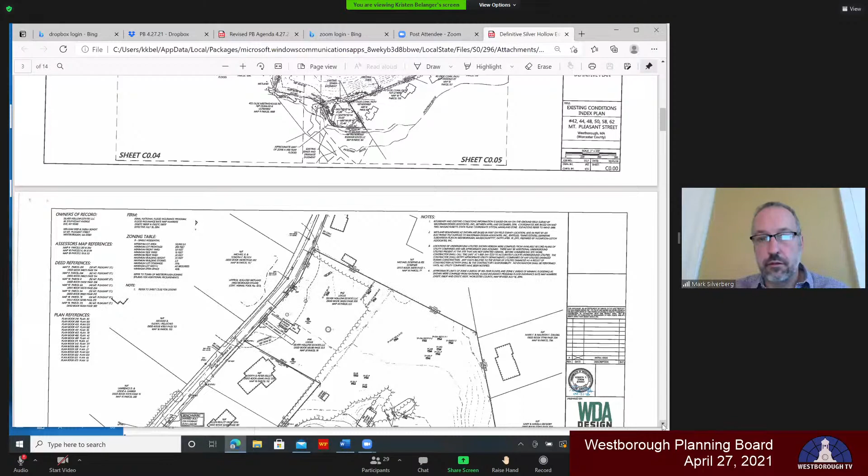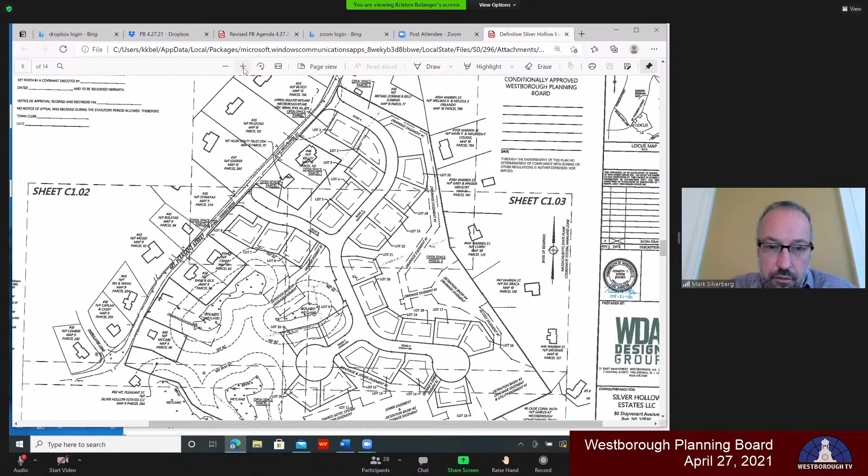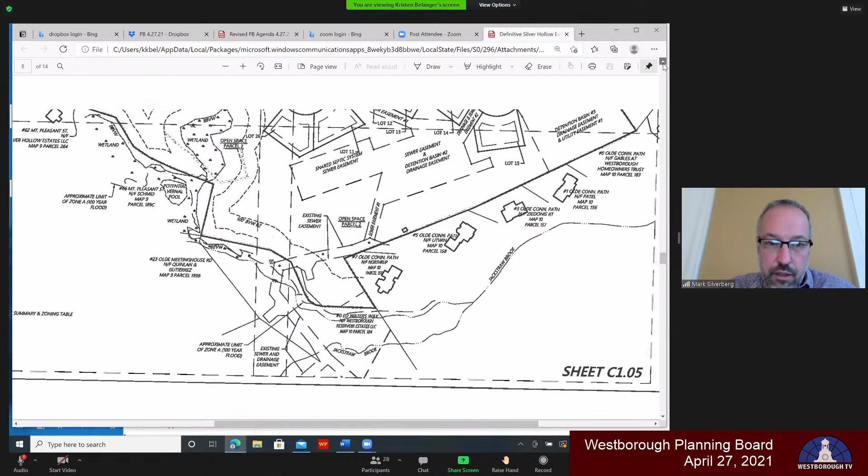All right, Kristen, I think you're bringing up the... Oh, okay. No, that doesn't have the lot numbers on it. Yeah, it does. They're tough to see, but they are there. I'm not sure if this can be enlarged, and the action is in the middle with these 10, 11, 12. Okay, so Road A on this subdivision plan, that's Barred Owl, the longest cul-de-sac? Yes. And Blue Heron is Road B, which goes out to Mount Pleasant.

No, Blue Heron is Road C. So Barred Owl is the one that goes all the way to Mount Pleasant, and you're right, that is one of the longest roads. I think this is called Blue Heron on a more recent plan. And so I see 11 and 12 there. Howard, this is lot 12. Is this the one you said?

I'm sorry, I'm not seeing what you're pointing to. Right here in the center. You see the little pointer? What were the lots again? It's 10, 11, and 12. There's 12, and 11 is behind it, so it could all be 10, 11, and 12. Can you see my pointer? No. So this cul-de-sac is Blue Heron Court, and 10, 11, and 12. Do you see that, Hazel?

Hazel, can you see that? You're muted. You're muted. Yes, I can see them.

Okay, what are the other lots being released whose numbers haven't changed? The ones staying as part of the release are 7, 8, down towards the beginning near Barred Owl, closer to Mount Pleasant. Also 21, 22, 23, and 24. Got it.

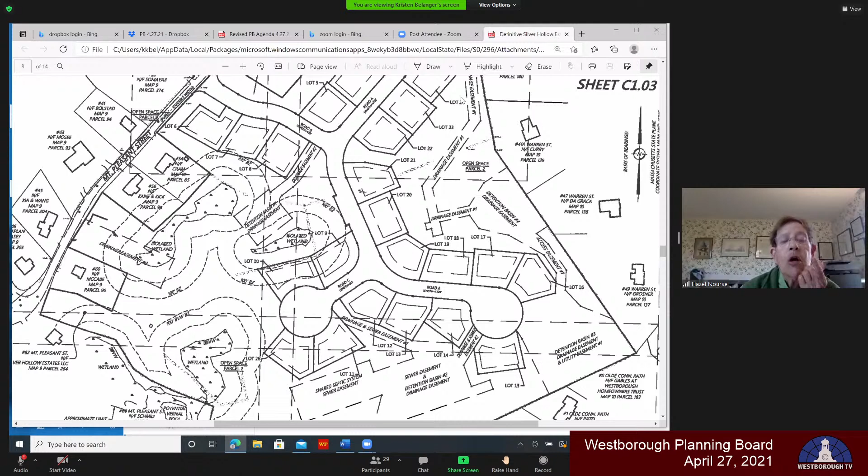All right, any other questions? We'll give Howard a chance. I have a question. The complaints that are coming in—are they all about the lots being worked on at the moment? Yes, that's my understanding. And again, we apologize for this. It should not be happening.

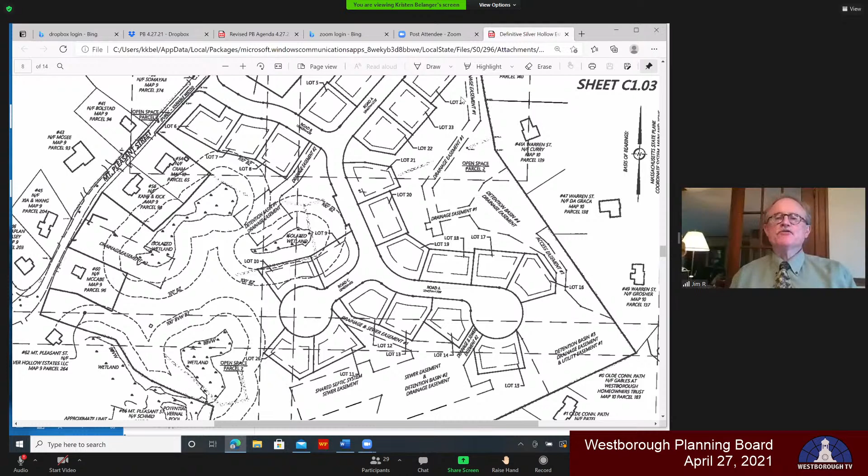Kristen, can you scroll the screen down? It's lots 1 and 2, which are right by the entrance. Pull the screen down. There you go. Do you see lots 1 and 2? Yep, right at the entrance. Those are the two lots being worked on, and those are the two lots that have received complaints. That's what I figured.

Were those released in a prior round? Yes. And those are the lots connected to town sewer? Correct. For the board's interest, there were 6 lots connected to town sewer, so they had 6 credits, and they asked for those 6 lots the first time around. Lots 1 and 2 are the first of those.

Okay, any other questions from the board? Does anybody want to make a motion on this? I would prefer to wait till next week to hear from the applicant about the issues we addressed at the outset. So if somebody wants to make a motion, we can discuss it.

I move that we adjourn this matter to our next meeting. Is it next Tuesday, May 4th? Tuesday, May 4th, yeah. I'll second that motion. Any discussion?

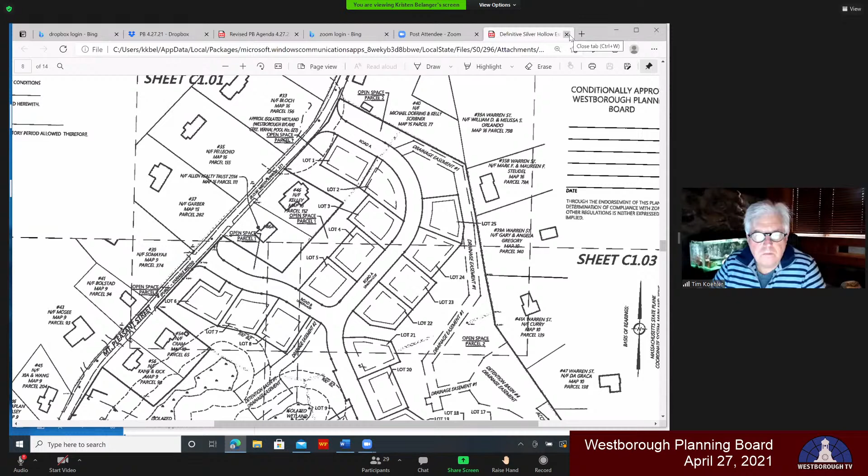Okay, I will move to a roll call vote. All those in favor: Hazel, yes. Jim Ball, yes. Tim Koehler, yes. Peter Bouchard, yes. And I vote yes as well. That's 5-0. Howard, if you could rejoin us next week, and please ask the applicant to attend the meeting.

Absolutely. I apologize again. I appreciate your consideration for this, and we'll see you next Tuesday.

Mark, before we leave this issue, maybe I should have brought it up before. Can the applicant please provide in writing the measures that will be taken—whether it's signage, posting a guard? I'd like to know specifically what they're going to do that can be objectively observed to address the problem, since simply passing communication to the contractors has not been effective. So I want to know what measures will be taken in addition to whatever has already been done.

And what's in place—agree with that when we discuss this again. Okay, thank you.

We will move on to the next agenda item. Howard, thanks for coming in. Thank you all, nice to see you. Thank you.

The next item on the agenda is a review and consideration of the preliminary residential subdivision plan for Rugged Trails, 228 Ruggles Street. Jim Robbins, I'll start with you to introduce this topic, and then we'll turn it over to the applicant for any presentation.

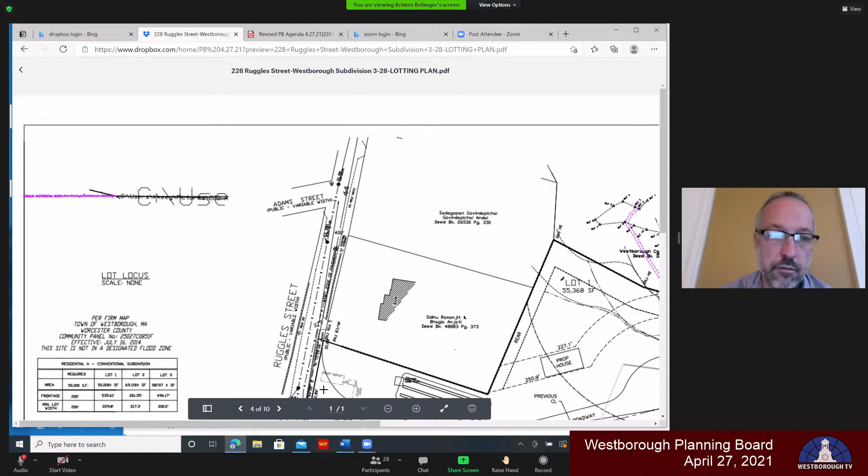Thank you, Mr. Chairman. As you know, this plan has been in front of the board for many months. One issue we were having was with the third lot—the lot on the top left of the cul-de-sac—making sure the house could actually be placed on it in a way that would conform with the town's zoning requirements for lot width, because that lot has an odd triangular shape with a tail running down towards the front on Ruggles Street.

After redesigning the lot and repositioning the home on the lot, the zoning enforcement officer is now willing to say that they can achieve the minimum required lot width.

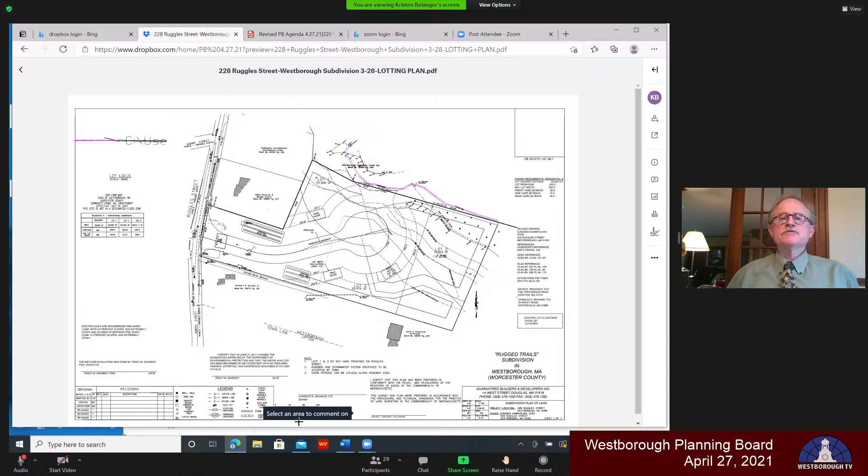We have complied with the frontage, lot area, and lot width. As Jim says, we got a letter from Fred Leonardo. I spoke with Board of Health many months ago, they're okay with the plan. We've done perk testing out there, and they will verify our two septic systems at the time we submit them. They didn't have any issues with the groundwater or anything, that would be submitted to them once it is submitted to them.

Lot 2 will be connected to sewer. We're allowed one sewer connection, and that's the lot we chose to connect. All lots will have town water.

We're looking for, I believe, one waiver, on the width of the pavement. The requirement is 26 feet, and we're asking for 24. That roadway length is 545 feet, and the roadway right-of-way width is 50 feet.

We have spoken with the Historical Commission. They were okay with demolishing the existing building on that site, but they wanted a couple of questions asked about the name. The owner of the property would like to call it Sarada Lane. Sarada means knowledge, and it's also his mother's name. That was the reason we were calling it that.

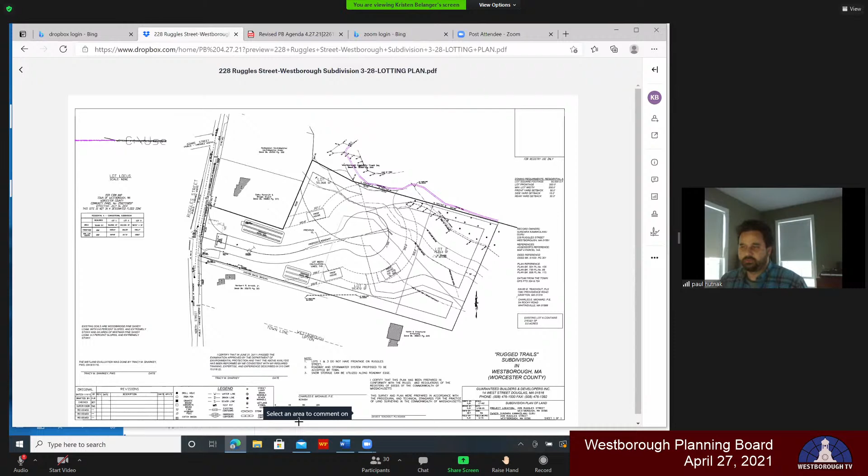Kristen, is it possible for me to share my screen and take you guys through the plan a little better? Okay, great, thank you. All right, you can see my screen now with the plan up on it? Yes, yes. Okay, thank you.

As was just mentioned, we've reconfigured this a bit, a closer view of the lots. Part of the calculation was to meet the lot width at the house and behind the house, so we took care of that. Another thing of note on this plan is that from the last meeting, we've added a small sidewalk easement that can be granted to the town, so if you do end up extending this sidewalk down Ruggles, you could then connect through this property to the sidewalk that will be on our property.

So here is the site plan area. As you can see, we have the roadway coming in, sloping down similar to before, and it comes into a cul-de-sac. This is the grading we're proposing. We have a plan profile as part of this preliminary plan as well, though we'd add every essential detail prior to a definitive submission. We wanted to show a good amount of detail to show you what was going on. We do have the house locations here.

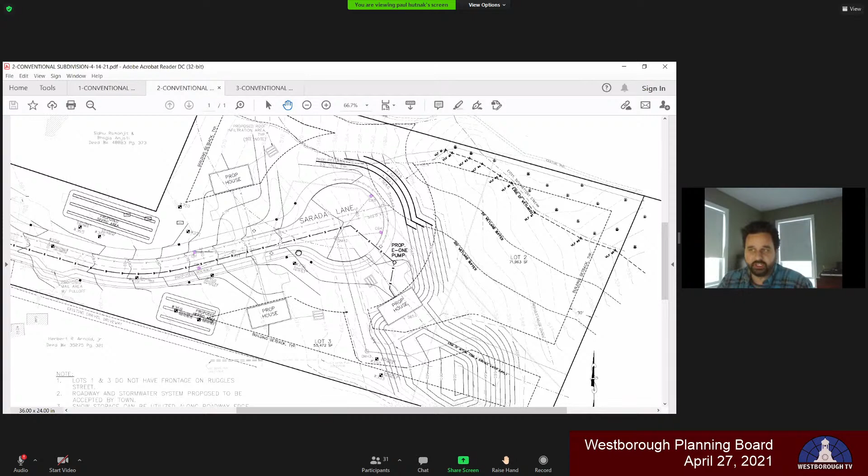We are on town water. As Karen mentioned, we have 2 septics, and lot number 2 will have a force main out to the street, connecting into the sewer in the roadway. And that is the project.

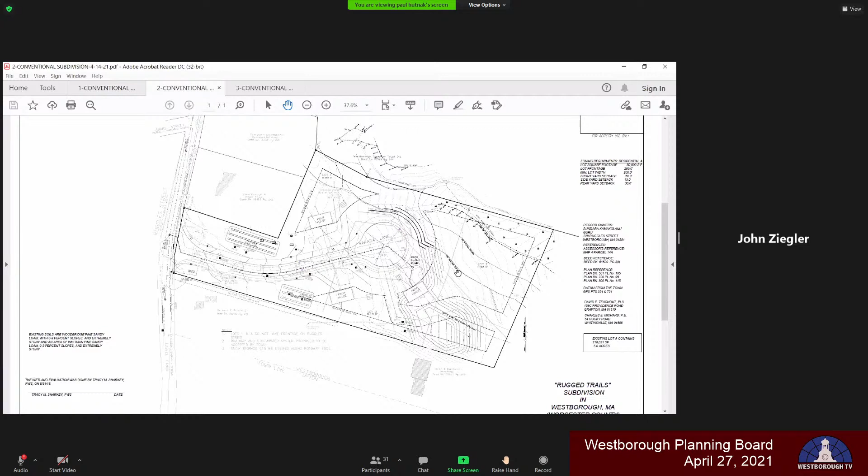Which lot is going on sewer? Number 2, right here - it's the back lot, essentially the furthest back. So that's actually the furthest from the sewer connection, I would think. It is, but that's the hardest spot to put a septic, in terms of the resource area. So it ends up being that one. In terms of sewer, they didn't necessarily care - they basically just say we have one connection because there's an existing connection, so it doesn't necessarily matter which lot to them.

Any other questions from the board?

I would encourage you to look at the open space subdivision as an option for this. I think you could make the cul-de-sac shorter and leave 2+ acres of open space that would abut the open space that I believe is Valley View Estates open space - I don't know if that's the right name. Like Long Drive and so on is down there, and I believe Westborough Community Land Trust owns a parcel immediately abutting this lot with a small pond on it.

Mark, you're sort of muffled. Sorry, let me see if I can adjust my microphone.

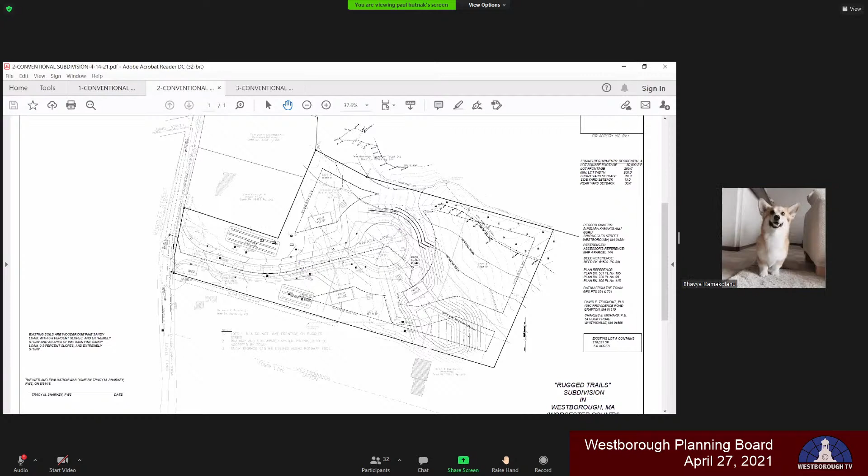What's the size of the overall parcel, Karen? 5 acres. Our regulations say, just for the board's knowledge, that if it's under 10 acres, it's the applicant's choice. Right. Okay. Well, I would prefer to see it as an open space, but obviously that's not an option in this one. All right. Any other questions from the board? Jim, do you need us to vote on this?

I have a couple comments before you move on. To the engineer, the regulations do require individual lamp posts at the end of each driveway. So you have 3 driveways, you'll have 3 lamp posts. Make sure that you take a look at the regulations so that you understand what that means. The intersection does require a street light, which you're proposing.

Thank you for that. There may be a utility pole somewhere near that intersection that would be applicable for adding a street light. However, you have to work with National Grid on that because they do own the utility poles. If not, you'll have to find a way to provide a street light at the end of that intersection. I think you'll be fine, but you need to work on that now.

Okay. I also want to be sure that your reduced width of roadway will accommodate our emergency vehicles, particularly our fire trucks. So the turning radius of your reduced cul-de-sac now, the paved area, needs to be able to accommodate the largest fire truck and the swept path for that. And that's something you'll need to work on during the definitive plan.

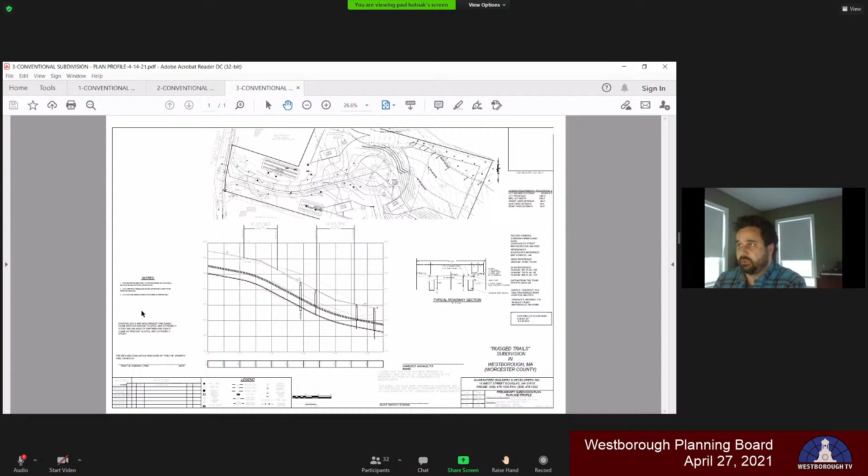I mean, there's 3 houses. So when we have 24 feet of pavement and 5 feet of sidewalk, that's a fairly significant amount of impervious area for 3 houses. So we're just trying to limit it as much as we can. And yes, I did add a note on plan 3 that a full fire truck turning analysis will be provided as part of the definitive subdivision.

So we do have that noted as well, for you to reference if you want to, or you can just condition it, or however you want to go about that. But yeah, we're certainly aware of that, and like I say, we will submit a formal waiver request with that reasoning. That would be great. And please note the section that you're requesting the waiver.

Okay. And also, Karen, during the initial proposal, there were a couple requests for waivers that now seem to have changed. So I'm going to disregard that and have you submit this as your new request. Okay. And we can talk more about it at the tail end of this week, so that we can make progress for our next meeting.

Okay. Sounds great. Jim, thanks for adding to that. I'm going to just go back to the board now that you brought up some other issues and see if anyone else had questions about that or anything else. I think we're all set. So you need us to motion to approve the preliminary plan?

I would just ask that someone make a motion to continue this to our next meeting. They've already given us... Okay, I'll make a motion to continue the discussion of the 228 Ruggles preliminary subdivision plan to our next meeting on May 4th at 6:30. Second. That, Mark. I heard Hazel first, so Hazel has a second. Any discussion? All those in favor, we'll do a roll call.

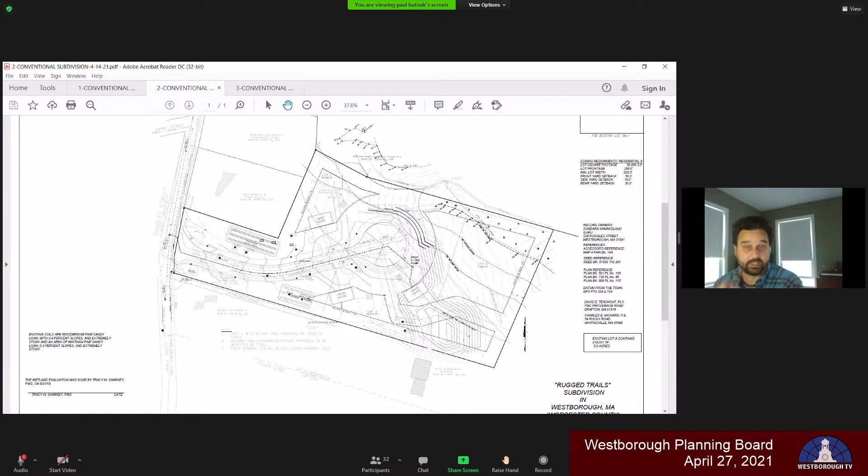Well, you're also continuing because you need to get the board to vote yes on your plan. And this is information that... That's good. I like that too. Yeah. Well, we're hearing this information for the first time tonight, and I don't have complete information to write an approval. Okay. So when I get that, that's why I said I'll work with Karen this week.

Sounds great. No, thank you. I appreciate it. I just wanted to make sure I understood what we needed to get you. So if I need to work on something, that's all. Sure. We'll get it worked out. No problem. All right, great. Thank you. Thank you, Jim. Thank you. All right. Can you stop sharing, Paul? Oh, sorry. Yeah.

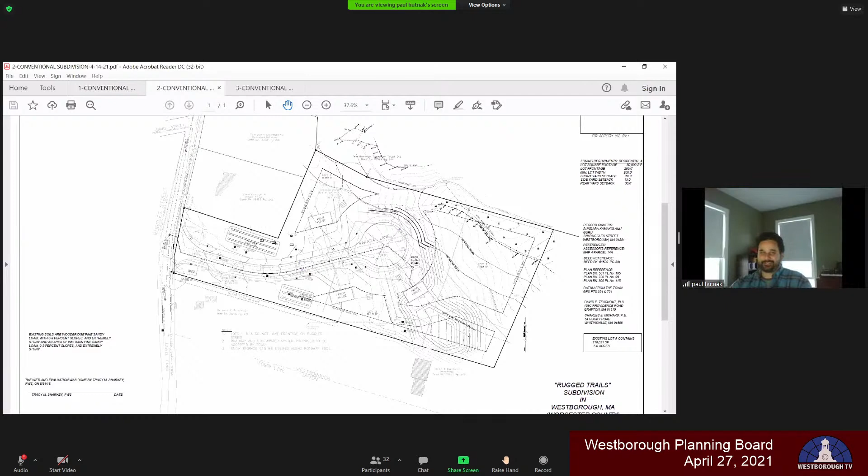All right, next item on the agenda is a continued public hearing for the site plan review application for 4400 Computer Drive. Jim, I'm going to turn this over to you as well to summarize where we're at, and then we'll have the applicant address the board. Thank you. So I see Bob Buckley representing Atlantic Management is on the call, as well as representatives from Atlantic Management and the owners Caruth Capital.

As you know, the last meeting was our first public hearing on this project, and we discussed everything from the site design to the impact potentially to abutters, to the intended use and operation of the site. At that meeting, we had a list of multiple questions that I typed up after the meeting and sent to the applicant the next day, requested them to come prepared this evening to address those.

The board received a letter from Attorney Buckley yesterday to address those. I haven't had time to review them with the applicant, so I would like to ask the applicant if they would present those answers for the first time this evening, and then we'll have an opportunity to react to those, and we can continue to work on them after this evening.

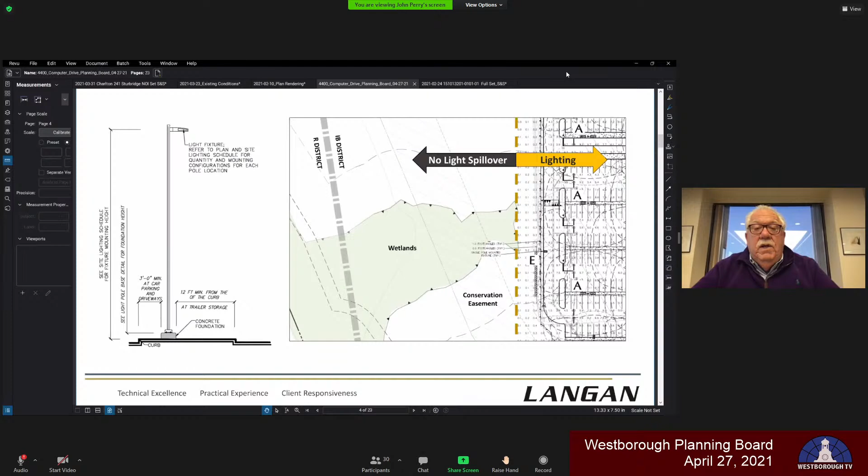And we have some graphic representation of that. This shows on the right is the lighting. The black arrow is no light spillover, and the hatched line going vertically is the control line. And you can see that that's quite a distance from the residential district. So we carry that around the site just to orient the board and the public. Where you see that lighting sign, that's the rear parking lot where NFI conducts its operations. And at the post-development phase of the project, there will be no light migration beyond that point. Again, a substantial distance from the residential properties that abut the project.

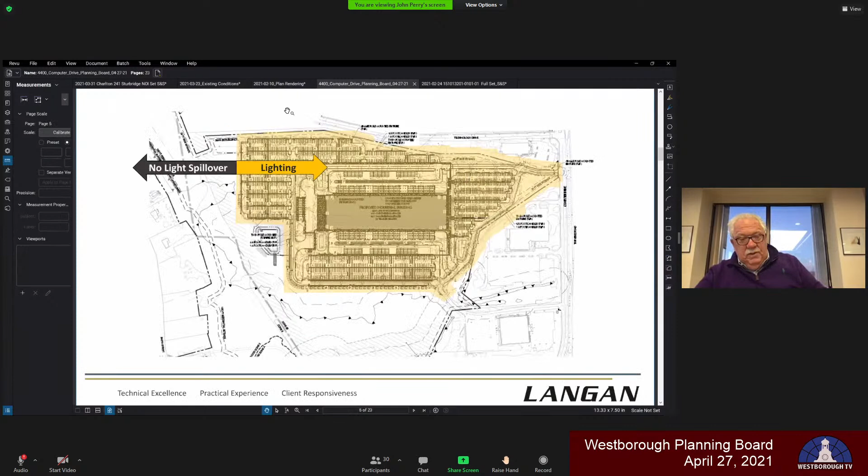There were some concerns about idling of vehicles and sound attenuation. Under the Mass DEP guidelines, as we quote there, there is a regulation that there'll be no idling in violation of that regulation. And certainly that is a requirement that we will adhere to. Moreover, when vehicles or trucks are unloading at the loading docks, it is policy that the engines are shut off and there's no light emanating from the headlights.

The new truck parking and loading docks will be over, it's cut off by the picture here, I can't see, 950 feet from the nearest house. Nearly twice the distance that exists today from the NFI operations. We are also going to maintain the 300 to 350 natural forest buffer. We are reducing the tractor trailers from the current operation, which is roughly 260 trips over a 24-hour period today from NFI, to 32 per day.

We are also exploring and will be updating the plans to provide sound absorbing and light blocking walls at truck parking and loading docks. So that will create an artificial buffer in addition to the natural buffer. Show the next slide, please. This is an example of the sound walls that will be placed adjacent to the loading docks to block both sound as well as light from the vehicles while they're located at the loading docks. Again, they'll be of sufficient height and sound attenuation quality to address the concern that was raised during the last hearing.

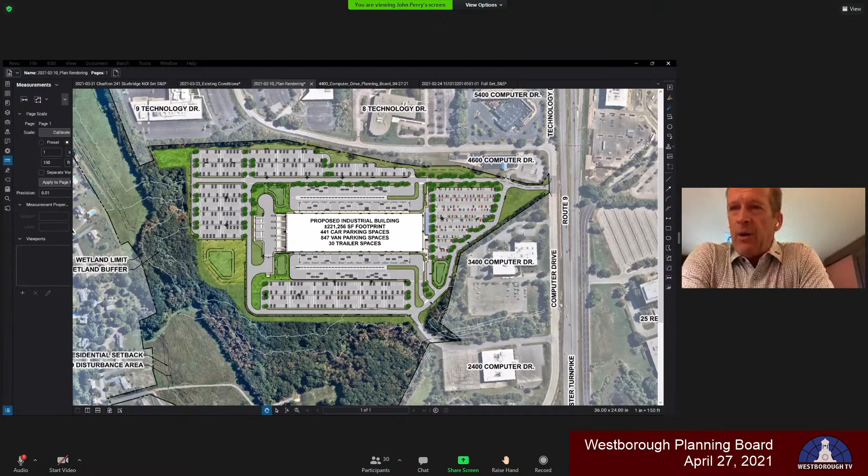All right. Any other questions from the board? Jim Ball, anything? Hazel? Yeah. Mark, go ahead, Hazel. No, you can go. I would comment that my preference is not to have the loading docks and the trucks at the front side of the property from an appearance, and I agree with the safety and flow. So my feeling is that moving it back away from that lower lot with the mitigation, I think that mitigation is very important, based on what we heard from the abutters last time, but I think that is well done. So from a safety standpoint and a flow standpoint, I like this setup. That was my only comment.

Hazel, you had something? Yeah, I just wanted to say that I'd gone up and looked at the site and gone up and looked from the residential viewpoint, and I think the mitigation efforts are going to make a huge difference to the people that are living back to the commercial properties there. It's certainly going to definitely improve what they're living with now. And I, quite frankly, am impressed with the mitigation efforts which the applicant has put forth at this point, because I think it's going to make a huge difference to the neighborhood. And I think they all make sense, and I understand perfectly about the parking and the safety, and just the flow of traffic, the way it's set up.

I mean, you have to look at it on how this business is going to run, and the easiest flow of traffic is going to make the least amount of impact upon the neighborhood, because you're not going to have trucks stopping and starting or parking and sitting in various places. So I really thank the applicant for the time and effort they've put in to try to make this compatible with the neighborhood.

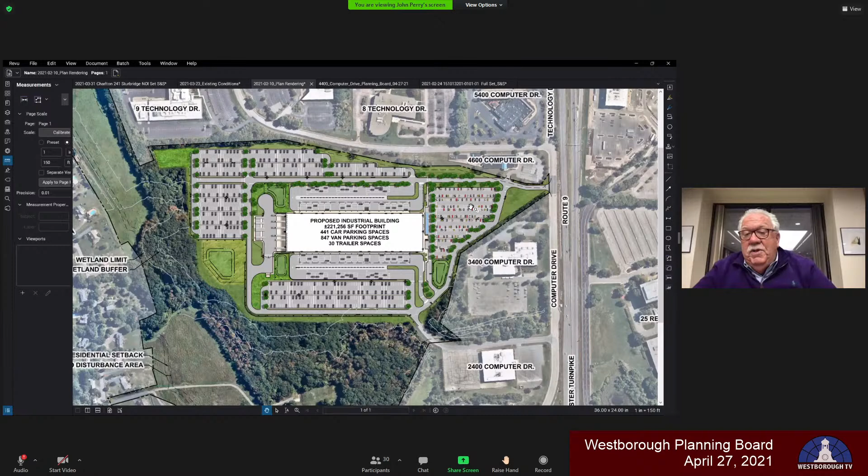Mr. Chairman, if we could go back to the site plan, and you could show me where those employees are parking. Yeah, go ahead, John. Those employees park in the front parking here. Okay. That ties in, Mr. Chairman, to what we were talking about earlier, that the impacts there will certainly not be visible or impact the abutters because they'll be front of the building operations. Okay, so I guess that answers one of my questions.

You also have, I believe you had said at the last meeting, that most of the trucks will be coming in around the clock. And I just would like to know the route of those trucks as they come in. Are they all taking the same entrance point and heading back to the loading docks and unloading? Yep. The tractor trailers come in between 10 at night and 8 in the morning. And they're all going to come in where the current trucking operations come in, through 2400 Computer Drive. They'll come through here and right into the loading dock area here.

Okay. So one of the points I'd like to make on that is, and I'll be interested to see the location of your sound mitigation barriers and light mitigation barriers, but as those trucks come down that long stretch at the southern portion of the site and approach that corner, I would certainly like to see some mitigation at that corner, so that the headlights and sound from those trucks do not affect the residential neighborhood. I think there's other spots on the site that need to be addressed, but that's one of the points I'd like to make.

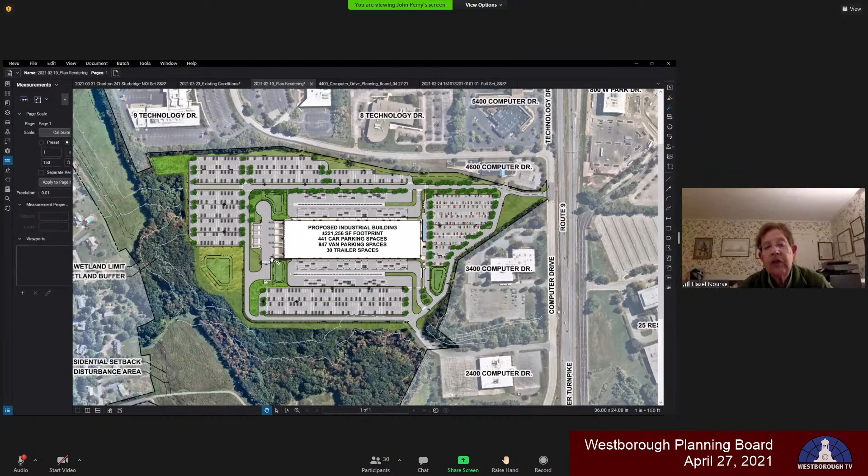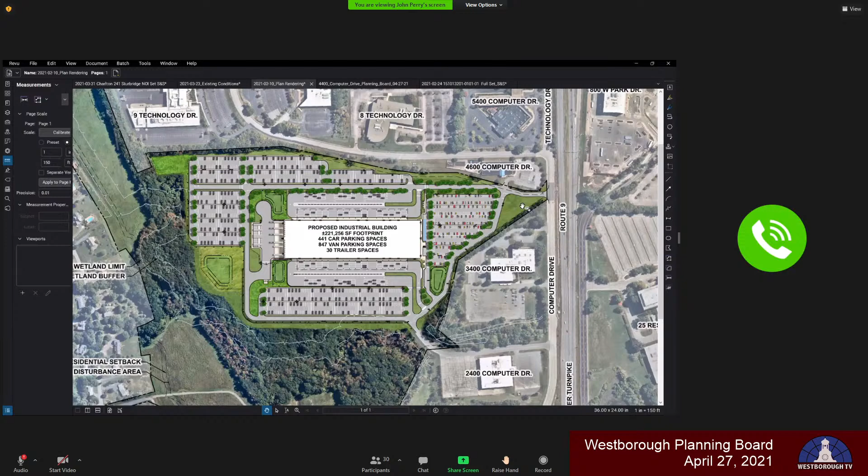I recorded that decision. Okay, that's good. They sent me the recording. Good, we'll upload that. Yeah, I got it uploaded. Can I just interrupt? Whoever, Kristen, I'm not sure. I don't know what's the phone number.

Okay, thank you, Hazel, for your question. And I guess, John, did you understand that through all the distraction? John, you're muted. Sorry. I did. I think the question was, can they come up on the more eastern access point?

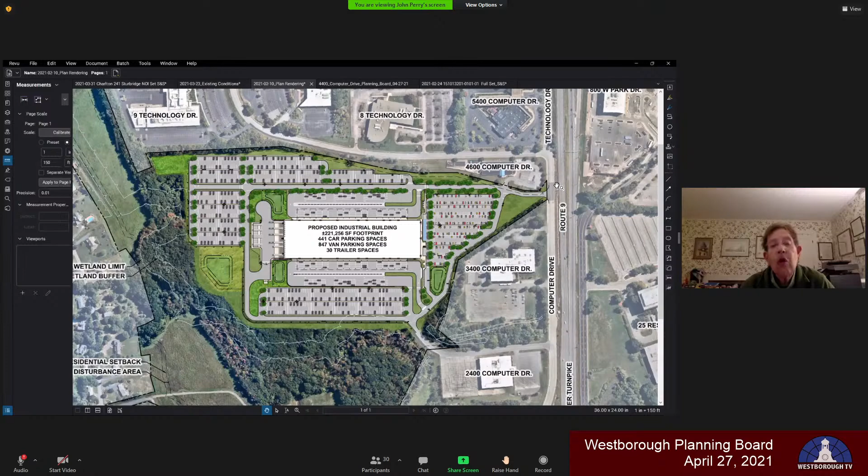No, the question was whether they could leave - I'm talking about your trucks that are in there early morning, whether they can leave once they've been loaded, going back out, the trucks, not the vans. I don't see an arrow in here, but okay, let's say north is in that direction.

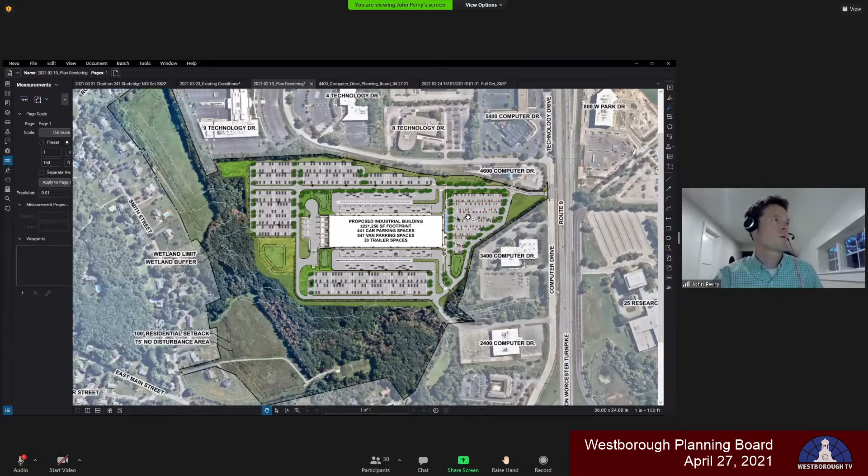So John, north is left. The trucks are currently leaving the same way they came in, right? The intent is for the trucks to leave the same way they came in, and the main reason for that is, we talked about a shift change for the employees, right. A lot of the trucks are overnight, as we discussed, so the main goal here is site safety and circulation. We really want to try to keep the trucks in their own route so they don't interfere with the employees coming and going. So having them come and go from this access point here, they never intermingle with the employee parking lot.

And if they came out this more eastern point here, they would. Yeah, but not much, because if your employees are coming in, they're parking in this lot down over here, so there really isn't any interaction. The employees could come in a different way - there are ways to do that, but I just think it might be less bothersome, the headlights and things, because it's the middle of the night if they're coming out the other direction.

So you're saying have them come in the western route here, come in, and then they leave going out this way? Well, just straight across, so you don't need them to stop here. I don't see why they can't just go right through and come back out again and go out the other way - then they don't even have to turn around.

What might be helpful is that when we show the dimensions of the sound attenuation and the light attenuation, the locations and where we're going to strategically place that - we'll take a look at that so maybe we could provide some comfort to the board. I think it's something you ought to consider because... No, I see what you're saying.

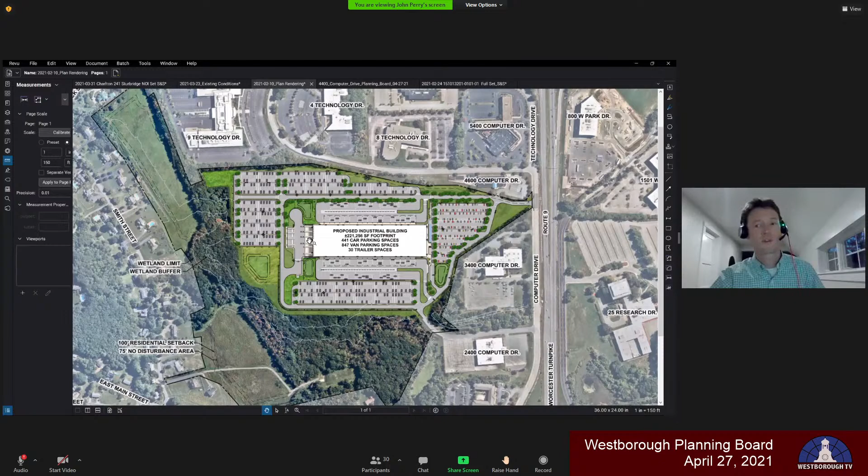I think we need to focus on the betterments here. There are 250 plus trucks operating on site now. We're going to have 35 truck trips. We're doubling the distance essentially from where they are now, and putting up sound walls. But we can take a look at that circulation.

This is not the point of balancing betterments versus the way things are. This is the point of making this facility work for everybody, including the community and the applicant. So we're not trading betterments. We're just trying to come up with a plan which really works for everybody and is the least disruptive on everybody.

I think you've already shown that you're willing to address our issues and to at least look at some of the things we bring up. And I think that adjusting the traffic flow, while it may not be feasible, I think you should look at it and give us maybe some alternatives to where the trucks come in and where the employees come in, so that we can improve this site as best as possible. So I like Hazel's point.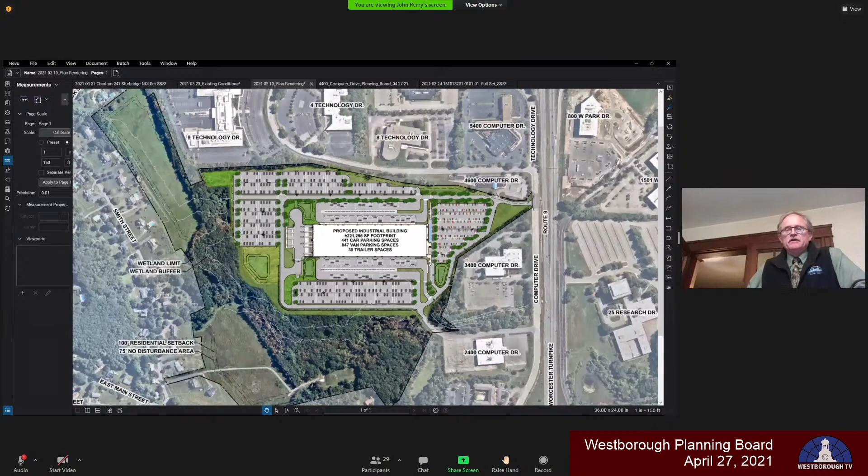Agreed. And I would like to have the fire department and the economic development director involved in that discussion, and anyone that they feel appropriate as well, together with us talking about who a consultant would be, and then bring that back to the planning board. No objection. Thank you. Nothing else? Okay.

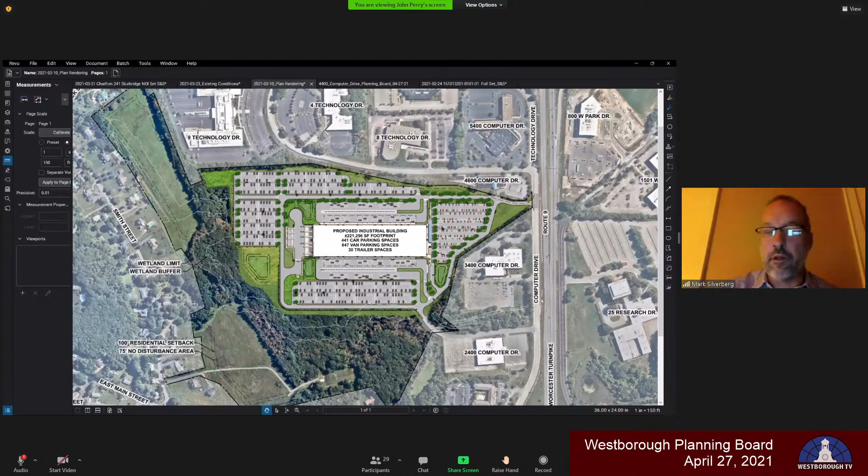I wondered if the applicant could please review the proposed sound absorption barrier, and go over the height, the length, and where it's located, and any other details of that, please.

Well, this is through the chair. Yes, Bob, go ahead. Okay.

At a minimum, it will be along the loading docks. John, if you could put your cursor there and show on this plan, it would wrap right through to that point. Based on what we've heard, in other areas we intend to use earthen berms along perimeters of parking lots, which would be effective, because the earth there, other than at the loading docks, would probably be a very effective sound attenuating device. The height down where you have vans is certainly not the same height or location as at the loading docks.

Based on the conversation over the last 15 minutes or so, I think we're going to be looking at other locations if we determine that the site circulation cannot be altered. We would look at placing it in strategic locations on the radius of the curb and perhaps along that back portion, so it provides both sound and light attenuation beyond what exists under this plan for the abutting property owners.

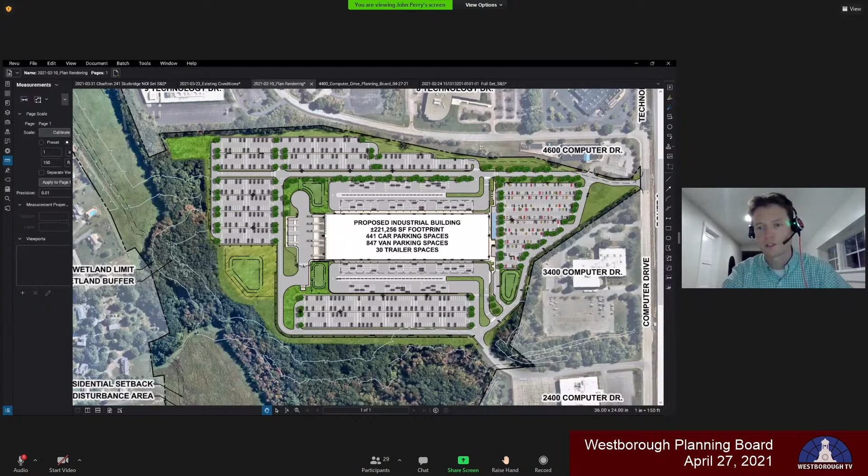But the height would be, I don't know, probably about 10 to 12 feet, John? We're consulting with a sound consultant to determine that height and material of the sound wall. There's various different types of materials - not just like the images we showed, which looked like wood, but they're actually a specialized composite system that is more acoustical in nature.

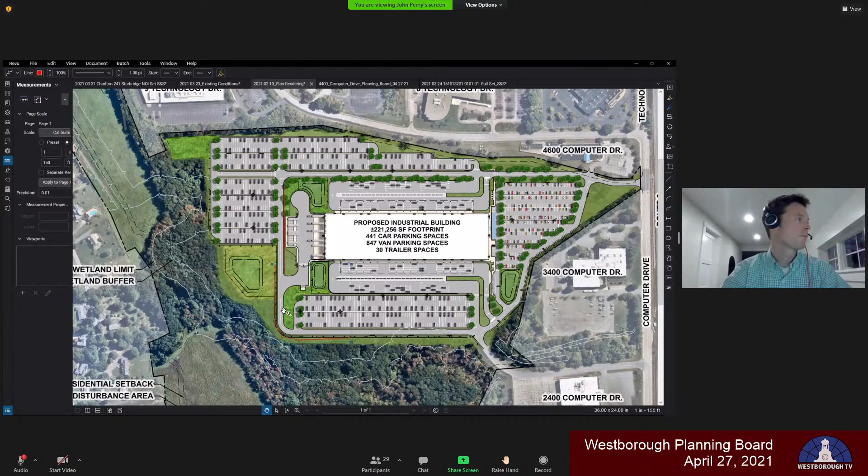And as Bob just mentioned, based on the discussions tonight, we were originally looking at something in this area here, but we're most likely going to be adding in maybe some overlap and something else down in this area to accommodate any lights that may be shining as they're driving down the street here, and also to mitigate any noise from the dumpster operations, which would be here as well.

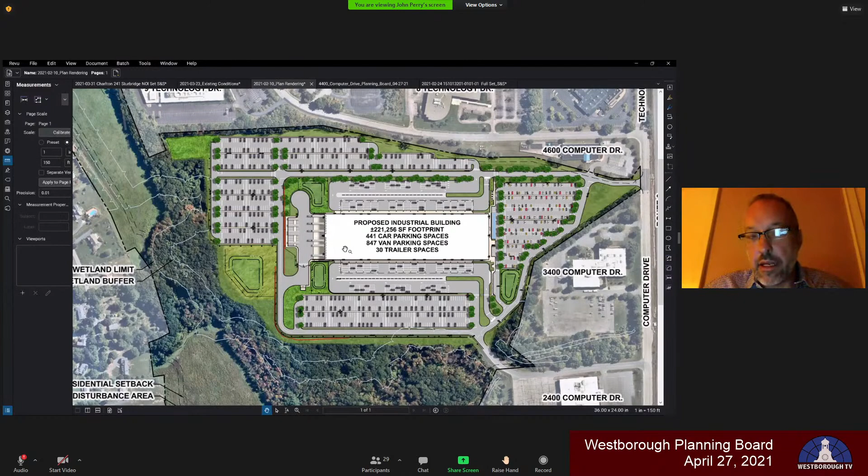So Joseph, I think the short answer is we're not sure yet, and we'll stay tuned for that. But if you have comments or suggestions about that, please speak up.

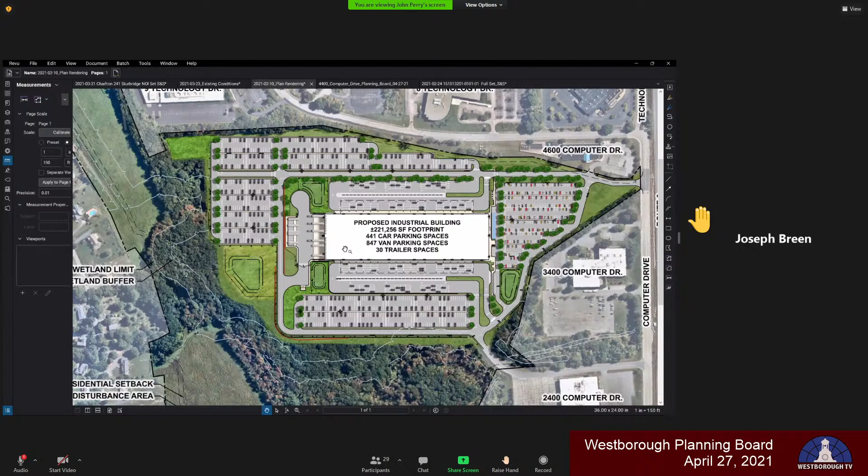Yes, if you could potentially pursue a precast concrete sound wall of somewhere in the order of a 15-foot height, I think it would be beneficial to absorb, obviously, the truck traffic lights, but also the noise of the trucks, which are going to be a 7-day-a-week operation year-round - that would be helpful in your sound study. Thank you. Okay, thank you, Joseph.

Deborah Ziegler, I see your hand up, and just a reminder, state your name and address, please. Hi, thank you. Deborah Ziegler, 23 Smith Street. I have a couple of hopefully quick questions. The first one was brought up last meeting but wasn't answered: where the trucks currently are is significantly lower than where you're proposing the trucks to be now. Can you please speak to what the elevation difference is? Because they are really low below the tree line, and when you move them up to that site for loading and unloading, it's really, really high above the houses.

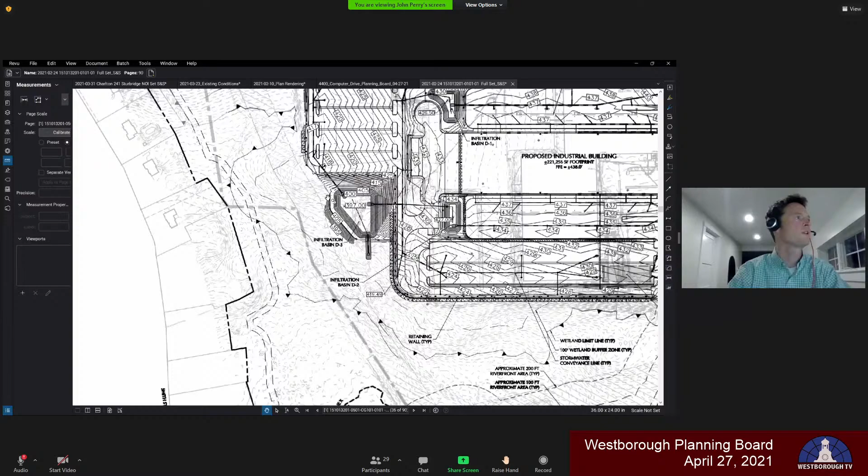Okay, John, are you going to address this? Yeah, I can address that. I'm pulling up our site plan here to address that. Looking at the existing grades, the houses are at roughly elevation 400 here, and these are at about 415, 420. So the existing trucks are about 15 to 20 feet above the houses on Smith Street.

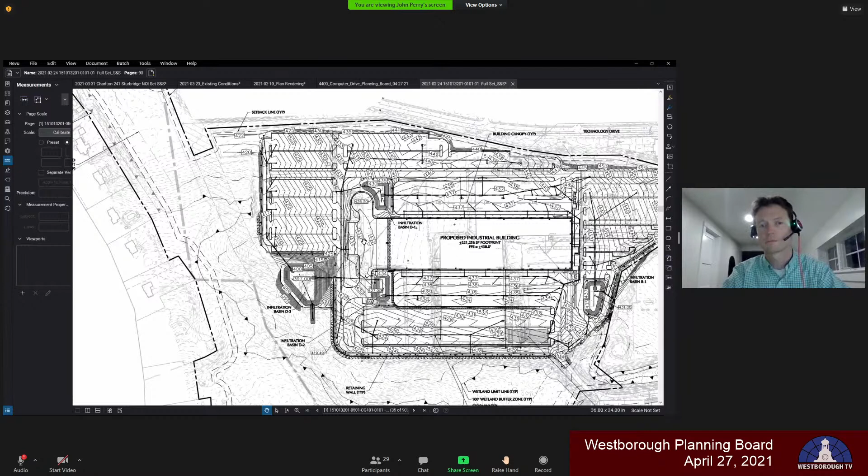And our loading dock is going to be at elevation 430, 433. So we're raising that up 10 to 15 feet. But also, we've talked a lot tonight in detail about the acoustical sound wall that is going to mitigate those effects. If you're higher up, everything will be over their roof.

So what the hell is she talking about, right? Okay, it's gonna be like over there. Okay, thank you for the comments. If you could please, Deborah, do you have something else you wanted to say?

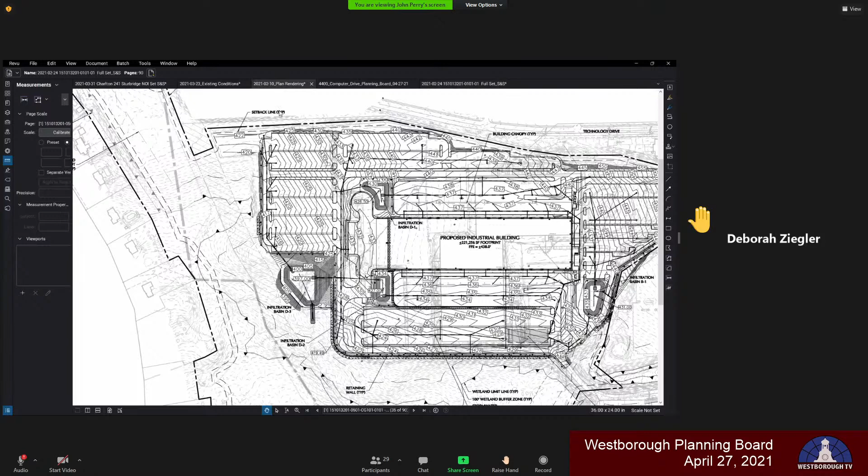So, two more quick things. One, why are we waiting decades for any kind of green heating, solar, electric initiatives? That seems almost insincere - that you're going to be a green building and have electric vehicles, but you're not even thinking about it for 10 years. What is the thinking on that?

I'm not sure where that 10 years came from. The word was decades. Someone spoke the word decades. That was me, and I was referencing, if you looked in the media, the applicant here has talked about their long-term plan. There was no inference or intent to imply that it would be decades before sustainable design and activities are going to be implemented on this site. That was just referencing the long-term objectives of the applicant as articulated in the press. But that was not intended to be site specific.

Yeah, so this is John Ziegler, Debbie's husband, same 23 Smith Street, but it almost seems totally counterproductive. If you put in a heating system that's natural gas, typically the lifespan of that is 20 years. So why would you waste the money to put that heating system in if you're just going to replace it? Well, it sounds like 20 years later you'd be replacing it with solar panels and green technology. So why wouldn't you just do it now?

Amazon supposedly says it's this green company. Why would you wait? Most of the houses on Smith Street, including ours, are fully solar powered. I don't use any heat other than what comes off of my solar electricity. I would hope that Amazon would be able to do the same thing. Bob, do you want to address that? Anyone? I think we'll look at it. We'll try to comment at the next meeting.

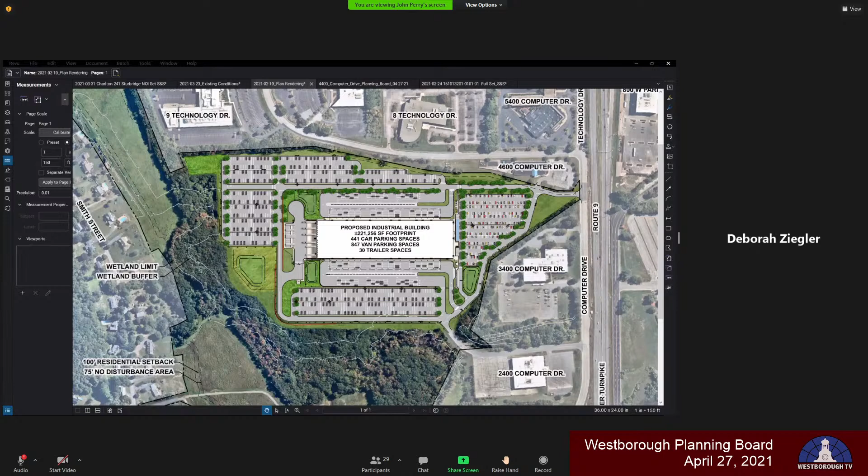That's all. Thank you. So I do have one further question, and it really has to do with the traffic. So if we could go back to that one graph that has all the different peaks. What I really don't understand is that big peak in the morning and the big peak in the evening. I understand there's van drivers that have to drive vans, but where are those van drivers coming from?

I didn't hear the question clearly. There's something like 800 vans, right? There's 800 plus van parking spaces. Right. But parking for 400 employees. So how does that work? Because on a normal day, on normal operations, a lot of the van drivers park in the empty van spaces. So there's not 800 plus vans operating out of this facility every day.

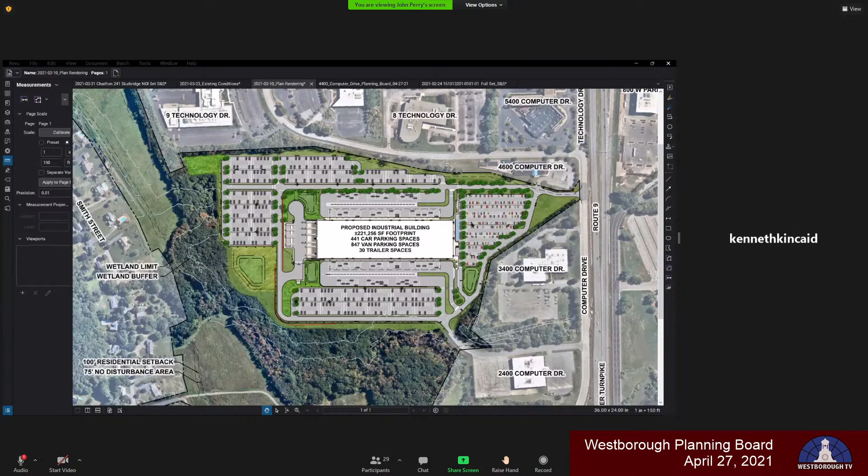My question about the traffic for the workers was already answered, and they're going to look into that. And again, my other question was about the solar panels. Why can't we put solar panels up there right now? Because your effect with all your electric cars is going to affect the electric grid in some way. So basically, a couple of my questions were answered, but I just wanted to add the fact about maybe planting some more trees to go along with the mitigation panels along the whole road that Ms. Nurse mentioned, along that curve where the trucks come in. So thank you. Okay. Thank you, Ken.

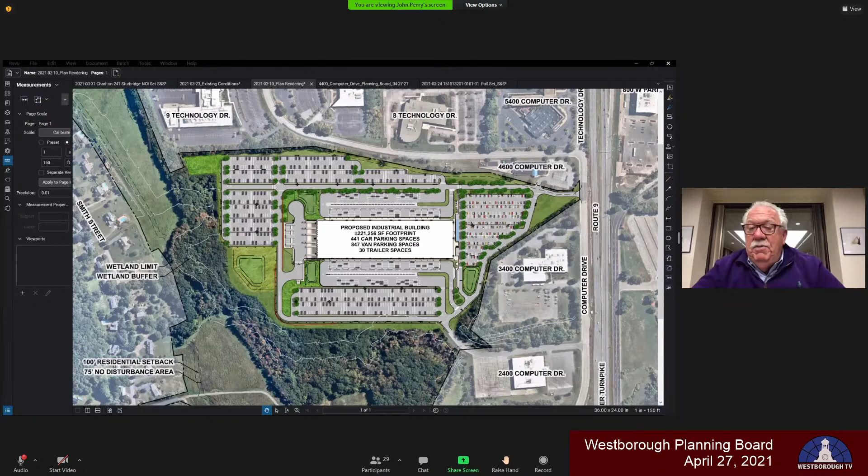Kristen, were there any other comments by email or anything else from the public? No, that was it. All right. So Jim Robbins, I think we're ready to continue this to May 4th. Is that right? Or are we going to be ready next week? Let me ask the applicant. Bob, do you feel that you'll have time between now and next Tuesday to make progress on these, or do you want to continue to the following meeting? You need to unmute. I suggest that we continue to the 4th. And if, at the end of this week, we feel that we're not in a position, I'll send you a letter asking you to push it on. Sounds good. Thank you, Bob.

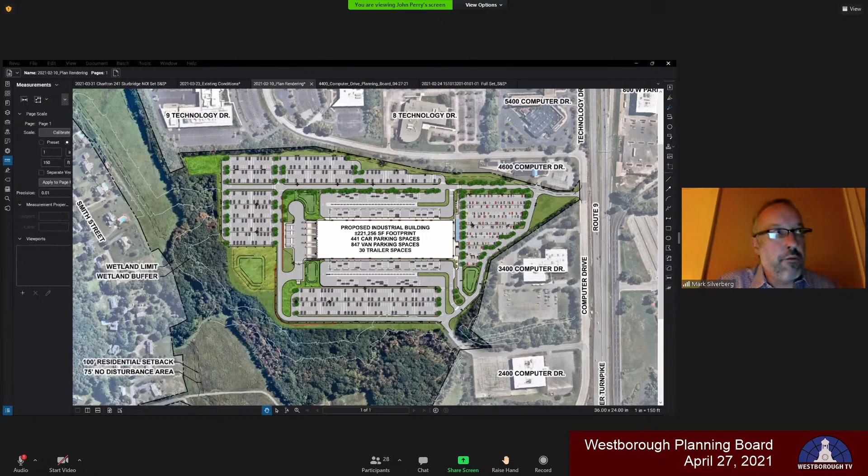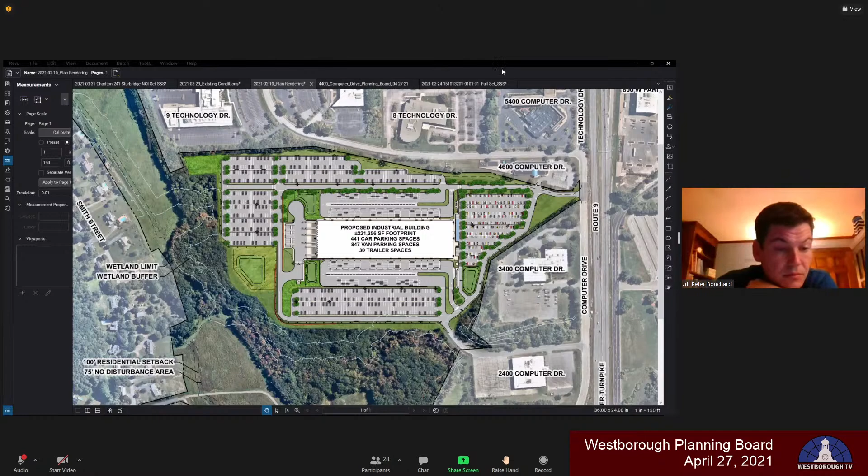All right, so I'll make a motion to continue the public hearing for the site plan review application at 4400 Computer Drive to May 4th at 6:30 p.m. I second that. Okay, I heard a second from Peter. Any discussion of the motion? Okay, all those in favor, we'll do a roll call. Peter Bouchard. Yes. Tim Taylor. Yes, Mark. Hazel Nurse. Yes. Jim Ball. Yes, Mark. Okay, and I vote yes as well. That's 5-0 to continue. Thank you all for attendance. We will move on to our next agenda item. Thank you for your time and consideration, and everyone please stay healthy. Okay, thank you. Thank you, Bob.

Our next agenda item is review and approval of the Tighe and Bond Engineering peer review, also at 4400 Computer Drive. Jim Robbins, again, I'll turn to you for a summary for the board. Sure. As you know, currently we have several site plans under review by the engineering department. The engineering department asked that we hire a peer reviewer to do this site plan.

Because they didn't have the capacity to conduct this as well as the others that they're doing. So our town engineer, Lisa Lane, reached out to several applicants, not just wondering if they can do the work, meaning our scope of review criteria, but also how quickly they can perform the review. Tighe and Bond, which is a large firm, which we've worked with before. As a matter of fact, they were an applicant to the master plan update RFP.

I know them well. They're a good firm. Lisa highly respects them. She recommends that we accept their scope of services. The applicant, Atlantic Management, has already seen it and signed it. You have a proposed motion in front of you for the entire amount of work. They expect to have a preliminary review for our next meeting, which is quite quick. They're a large firm, so I think they'll do a good job. We need your vote, though, to approve.